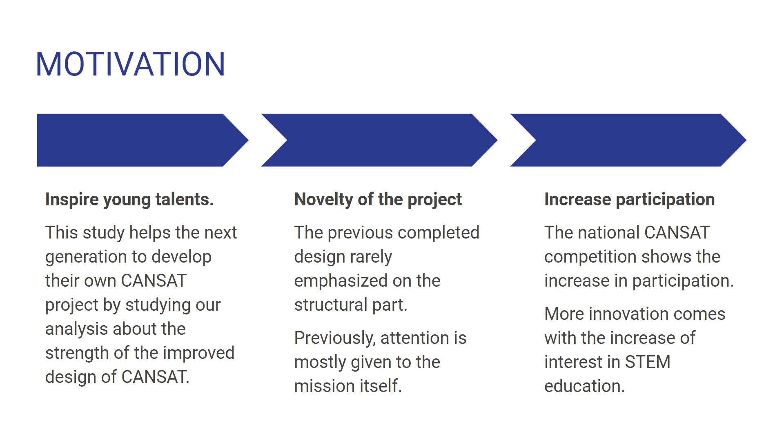All right. So we also find the problem in designing the CANSAT. First of all, of course, the CANSAT is constrained. From the name itself, CANSAT, can size satellite. The satellite is constrained to the dimension of the can, and of course, the mass is 350 gram, which is approximately equal to the mass of the can also.

And then the thing that I noticed in the CANSAT is that all of us want longer descent durations, because most people launch the CANSAT using rockets, and then the rocket ejects the CANSAT, and then it descends. So they want the descent times to be slower.

So how could that happen? It is the size of the parachute that helps with that. And of course, when the body lands on the ground, we don't want anything to happen to the body. So the mechanical properties of the material used specifically for the design of the body, we need to improve.

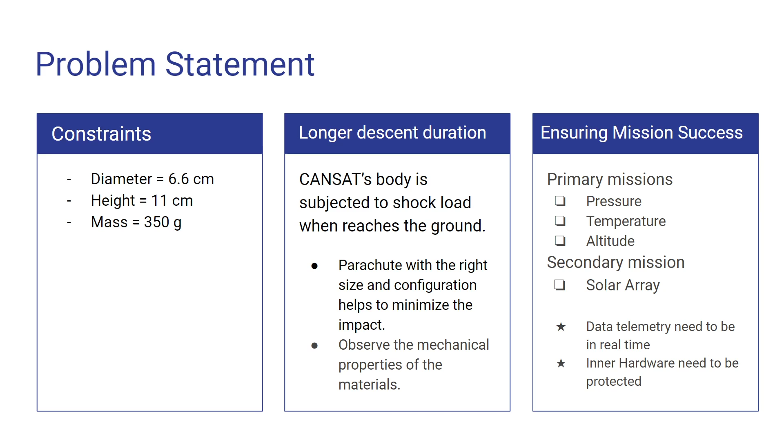Okay, now we go to the objective. Firstly, we want to identify the mechanical properties, just like what I said before. The mechanical properties of the material are very crucial to design the CANSAT body itself. And also, we want to find the mechanical properties of the fabric, because we want the fabric to be lightweight, and we don't want the fabric to be easily torn.

Next, the second objective: to determine the most suitable canopy profile and the size of the parachute together with the length of the suspension lines.

All of these preferences contribute to what we call longer descent durations. And then the third part, of course, we want to design the CANSAT against mechanical failure. Just like I said, we want the CANSAT, when it reaches the ground, the structure is still intact.

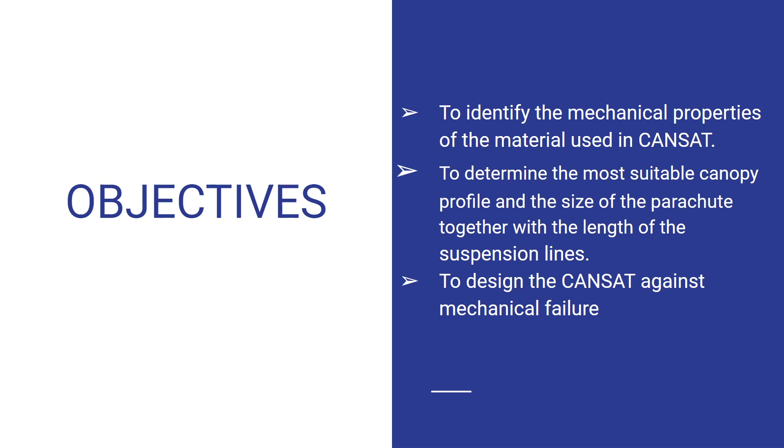So the CANSAT - what does it mean? It is obviously an acronym for can-sized satellite. And how does it all start? Yeah, the story is like this.

During 1998, there was a conference participated by a guy named Bob Twiggs and several students from University of Tokyo, and also together with them there was a society called ARLISS, a small rocketry group in America. From that conference, they discussed and decided to do the project CANSAT, and another project called CubeSat, which most countries are doing right now.

After that event, the CANSAT was created by University of Tokyo students, and it was launched in Black Rock Desert, Nevada, USA. The CANSAT itself is designed by the students. However, the sounding rocket is from ARLISS.

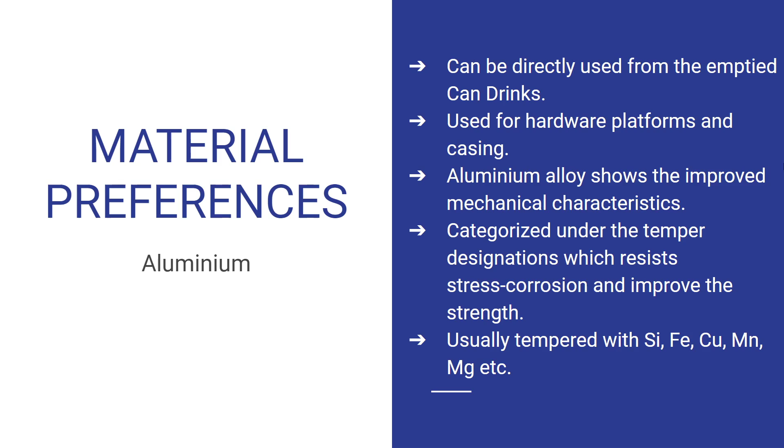However, despite the high mechanical characteristics, it is a heavily electrical conductive material, and it has problems when it comes to data telemetry transmission, because aluminium used as the casing, when used that way, forms something we call a Faraday cage.

In the Faraday cage concept, the experiment is like this: the electrical field from the outside cannot really penetrate or influence the electrical conductive material inside the cage. So in this situation, the casing itself becomes the Faraday cage.

So that's the idea. And then it's also thermal conductive, which disturbs temperature recording. One of the participants from the ESA competition - ESA stands for European Space Agency - faced this problem, so because of this, the data seemed very illogical.

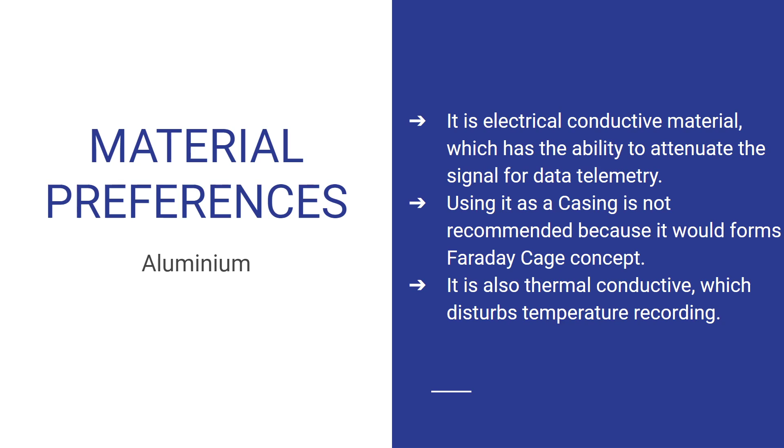The second one I want to talk about is the polymer. Polymer here is something like plastic. It is non-electrical and non-thermal conductive material, and also it is lightweight and has a low melting temperature.

Usually polymer - just like what we learned in high school - is covalent bond, covalent bond, meanwhile the metals, the aluminium, is ionized bond.

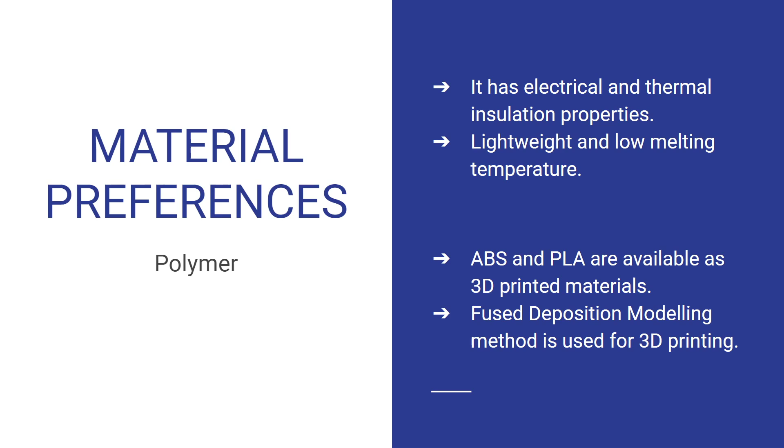The most common polymer used for manufacturing, for school projects and modeling nowadays, is 3D printed material. The most common 3D printed materials are ABS and PLA. Both of them fall under the category of material extrusion. Fused deposition modeling is one method of material extrusion, and this is exactly the method used for these two polymers. 3D printing also uses other materials, like steel and concrete, but most of them don't use this method.

Now, ABS is a type of material used for 3D printing. The characteristic of ABS is that it has a higher melting temperature, so it is easier to manufacture compared to PLA, though the difference isn't very far. But ABS has lower mechanical characteristics, meaning the yield strength, the ultimate tensile stress, and the Young modulus. So it's only suitable for a slightly higher temperature environment than what PLA might be used for, though again the difference isn't too far.

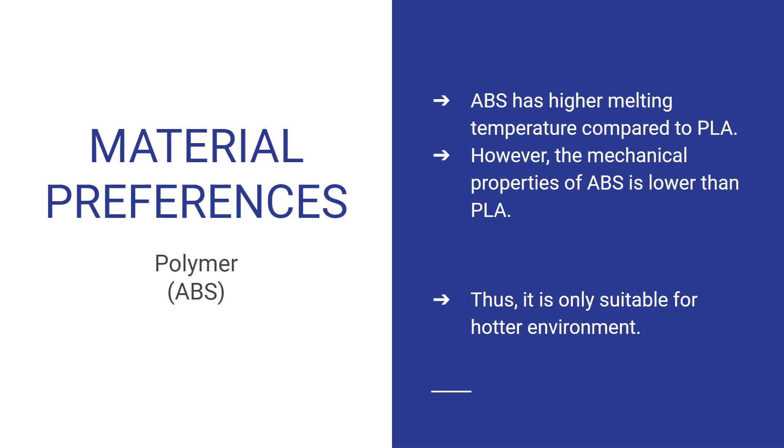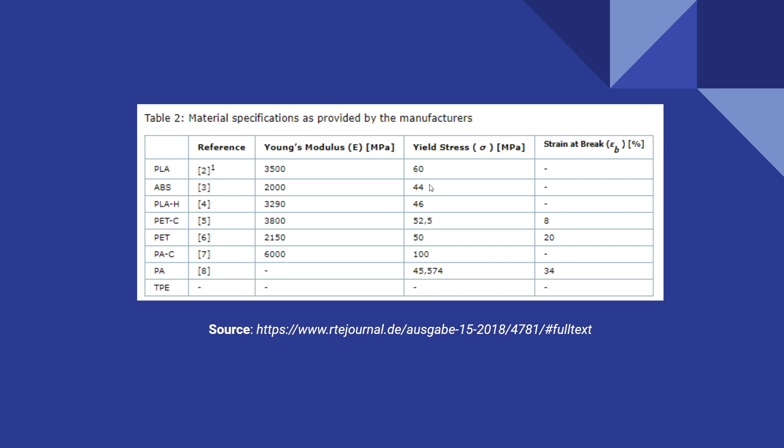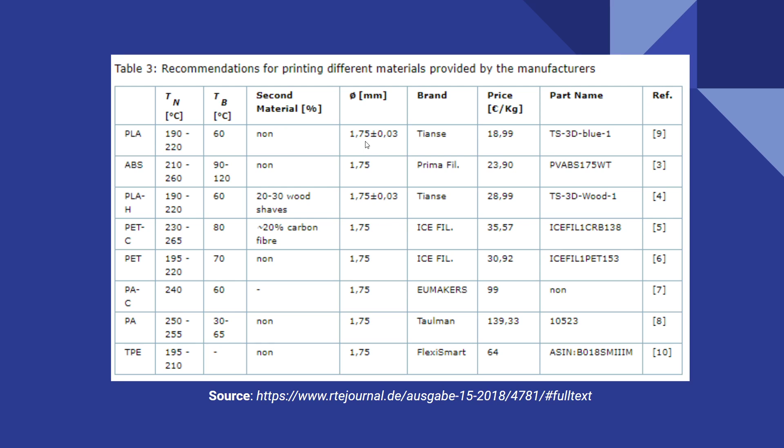Now for the parachute fabric, we have two possible candidates that are suitable: nylon and Kevlar. Let's talk about nylon. Nylon has low air permeability, meaning air cannot really pass through the fabric. It's lightweight, and the elongation is quite high, at 25%, compared to other polymers we'll discuss later, where the percentage isn't really high. 25% is a quarter of the original length.

Nylon melts at 260 degrees, which is completely useless for aerodynamic heating. So most space agencies, like NASA, don't use nylon for supersonic applications. Military applications such as the USAF also don't use nylon for drop parachutes. With that melting point of 260, the strength also declines under sunlight and hot environments.

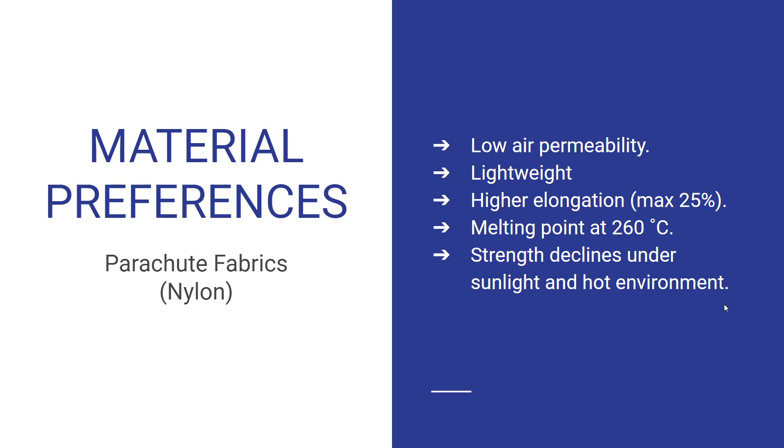Now let's go to Kevlar. Kevlar has a very high advantage, but it's not really preferred most of the time. It has a high strength-to-weight ratio. Kevlar 29 is usually the Kevlar type available for fabric. It elongates up to 3.5%, compared to nylon's 25% elongation.

Just like nylon, Kevlar's strength degrades at high temperature, but at 260 degrees Celsius, it still retains half of its strength, compared to nylon which suffers total loss. And of course, it saves volume and weight for the parachute itself—it is lighter than nylon.

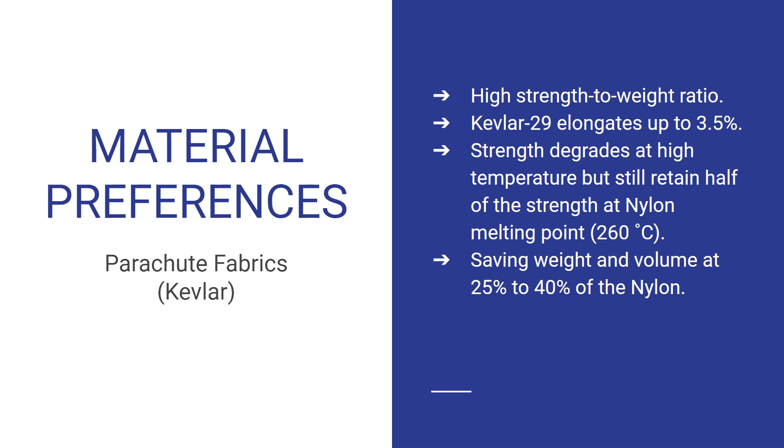Now this is the Kevlar-nylon hybrid, which is the most preferred combination by most researchers, because the strength-to-weight ratio of the Kevlar-nylon hybrid is considerably high compared to nylon alone, but it is lower than an all-Kevlar parachute.

The reason it is recommended is because Kevlar has higher strength while nylon has lower strength but higher elongation.

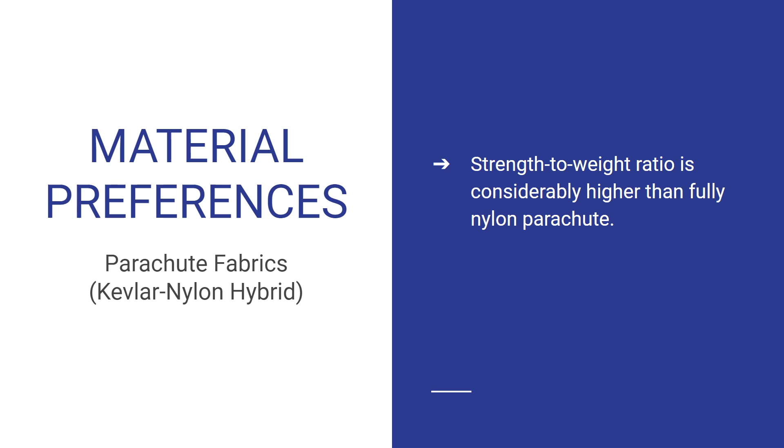And now for the mechanical configurations.

Okay, we start with the parachute. For the parachute, of course, it is one of the modes for descent control. We require the parachute to be designed properly because we want the descent of the CANSAT to be as low as possible for the data telemetry precision, so when the graph is plotted, it is accurate.

The type of the canopy determines the drag coefficient, and the size determines the area. The combination of both is actually included in the equations related to the drag force. So with an increase in the CD and the area, we could increase the drag force, which increases the duration of the descent.

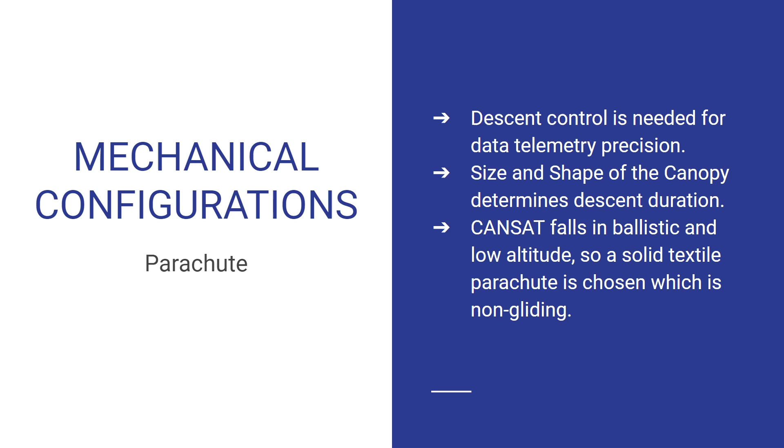Another mechanical configuration for the CANSAT is that we included a vent, which helps to stabilize the attitude of the parachute, and the suspension line of the parachute will be longer. Probably you don't understand the vent - the vent is the hole that we make on top of the parachute itself.

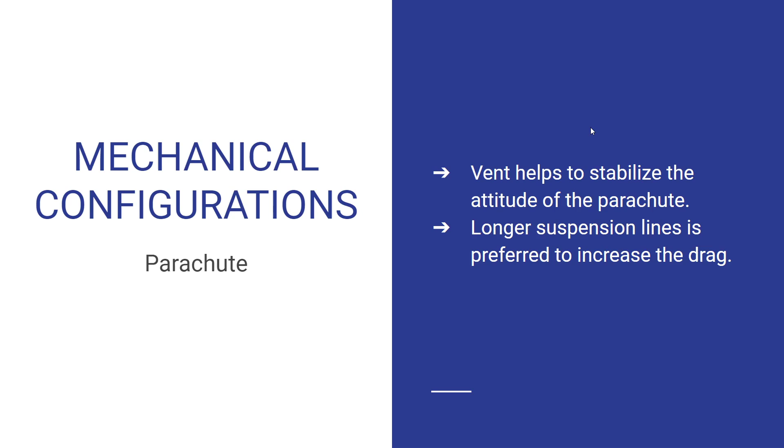Now we go to the mechanical configurations for the body. We want the body to have a factor of safety ranging from 1 to 2 according to literature, since it has dimension and weight restrictions.

And from another literature also, it is mentioned there - CG means the center of gravity. This needs to be located at the bottom of the CANSAT for attitude stability. Attitude is different from altitude - attitude means orientation.

From another literature, it says that the circuits are simplified into PCB for minimized space. PCB means printed circuit board - it is just like the miniaturized version of the circuits.

And then according to another literature, to prevent it from buckling, we need to impose structural idealization. So hence, the body is designed into a semi-monocoque structure.

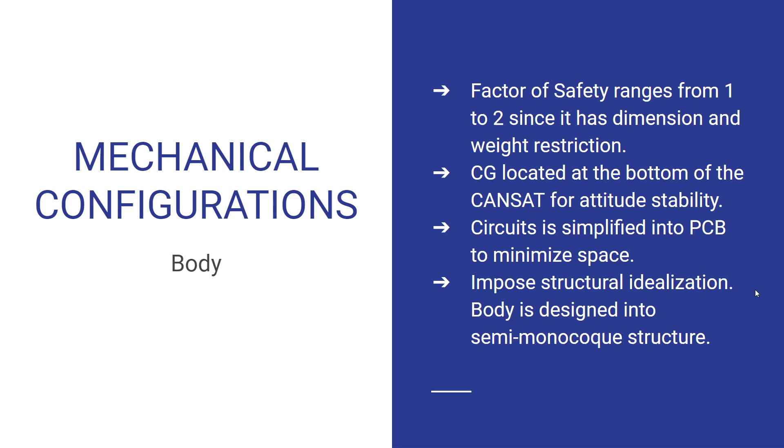So now, research methodology. For design procedure, we design the body into two separate parts, consisting of the outer shell and the inner ribs. A hole was made on top of the shell and also the inner ribs, because we want to put the parachute right there - we want to allow the parachute to be inflated when the CANSAT is released to the ground.

The ribs are divided into three sections, from the lightest at the top to the heaviest at the bottom, corresponding to the parachute compartment, the hardware, and the battery.

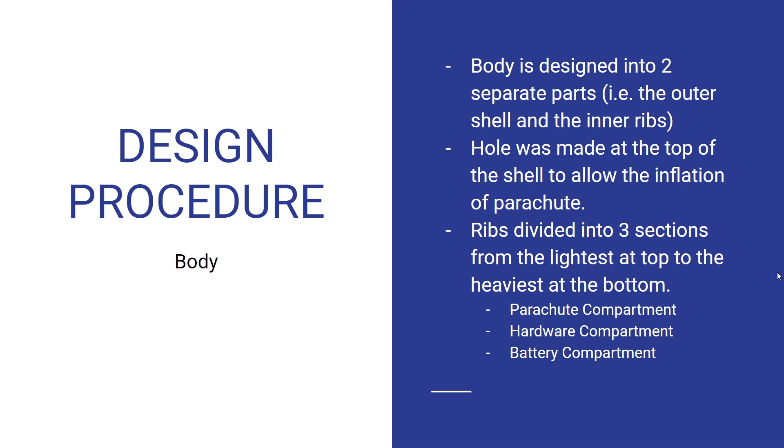And now for the parachute, we simply picked the hemispherical canopy for the profile. Why did we pick the hemispherical canopy? Actually, the hemispherical canopy does not contain the highest drag coefficient, but it is the most common profile used for paratrooping - we can name many, they all use hemispherical canopy.

Okay, after we design, we will do some analysis on both the body and the parachute. We can simply use finite element modeling using ANSYS. By using finite element modeling, we could find the elongation - I mean the strain - of the individual components, and next we can find the von Mises stress.

Von Mises stress is actually the yield stress, and then the buckling of the model itself. We could also find other parameters.

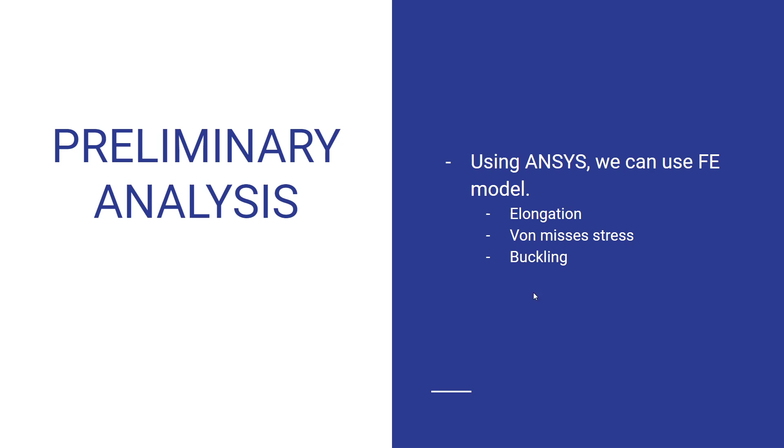So in conclusion, despite the limitations - I mean the weight and dimension limitations - the structure of the CANSAT could be improved with continuous research for structural optimization. Right now for structural optimization, we already have the iso grid, the ortho grid, the rib structure just like we have in aircraft, and we could also add stringers and so on. Okay, thank you very much.